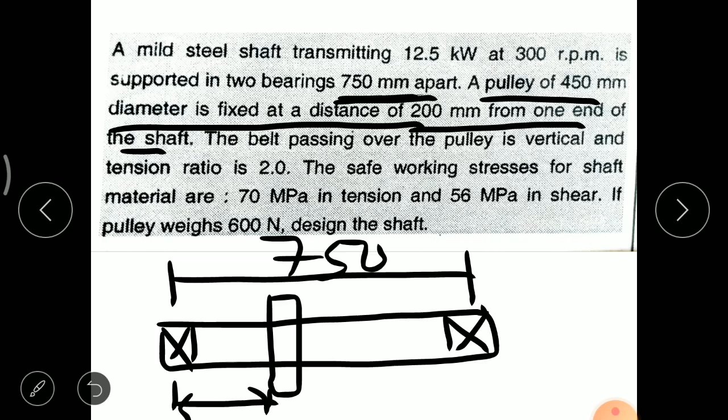Here the pulley is mounted at 200 mm distance from any one of the bearings. We will take this bearing nearest because we have to calculate moment also, and the distance between the bearing and pulley center is 200 mm. Here I will write 200 mm distance, and I will draw a side diagram, as this is the cross section of shaft and this is the cross section of pulley, over which two loads are there. This load is called T1 and this load is called T2, and there is load W, that is load of pulley, which is equal to 600 Newton.

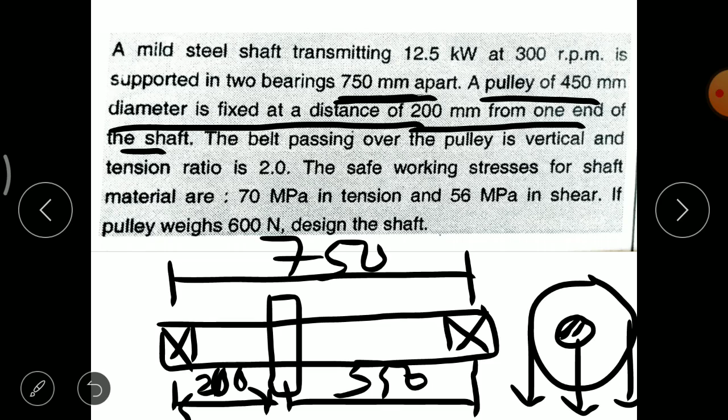Then the remaining distance from pulley to the second bearing is 550 mm. This is our diagram, and I will draw this diagram in notebook and we will solve this problem in notebook. Before that I will write given data and what we have to find. We have to find diameter of shaft, that is capital D, and the given data: P is equal to 12.5 kilowatt, N, that is RPM, is equal to 300.

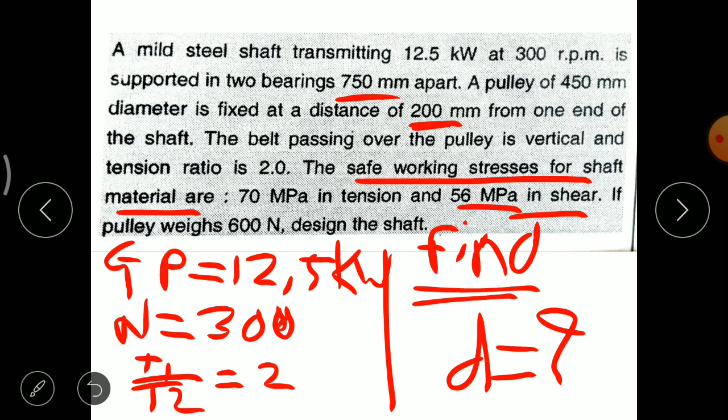Then this is the distance which we will mention in diagram. Tension ratio, that is T1 upon T2, is equal to 2. Then we have two safe working stresses of material. First one is 70 MPa in tension, and 56 MPa shear stress. That means sigma T is equal to 70 MPa, that is Newton per mm square, and tau is equal to 56 MPa, that is Newton per mm square. And now we will draw its diagram.

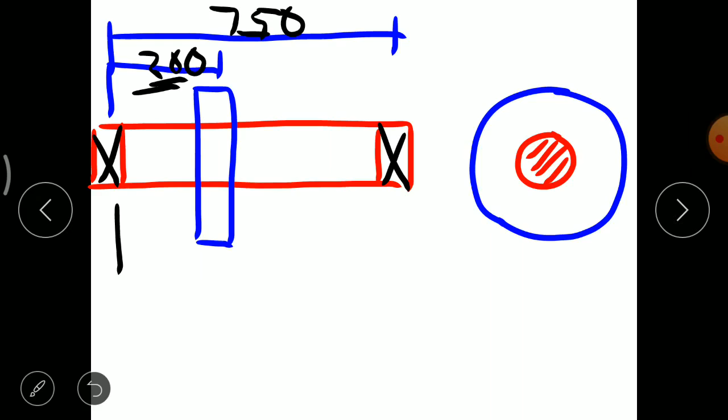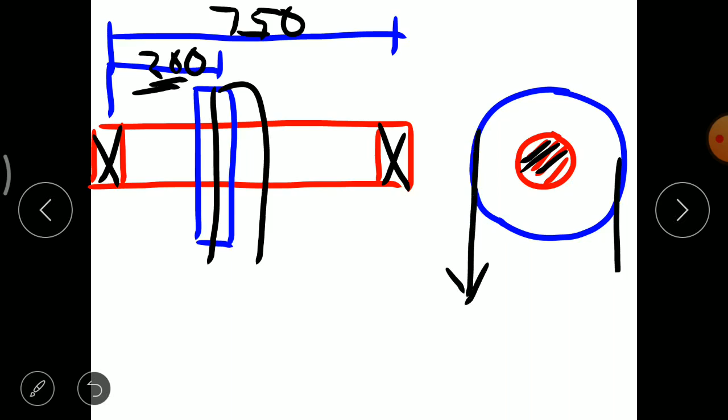This is a diagram of shaft, the red color one, over which we mounted one pulley at a distance of 200 mm from one bearing. The small circle is cross section of shaft, and the outer circle is cross section of pulley. Now they told us in the problem that the pulley is having belt in vertical direction. So I will draw two forces indicating T1 and T2, and the weight of pulley is at the center point, which is denoted by W.

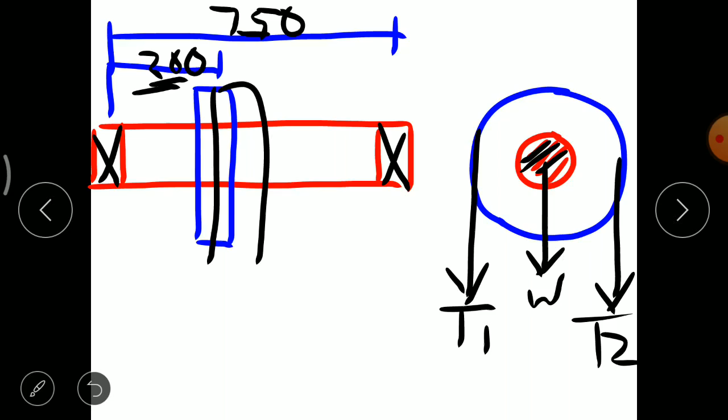T1 and T2 ratio is 2. These are the tensions on the belt, tension 1 and tension 2. Now after completing the diagram, we will solve primary things, that is torque, by using power formula, and then we use the T1 and T2 formula.

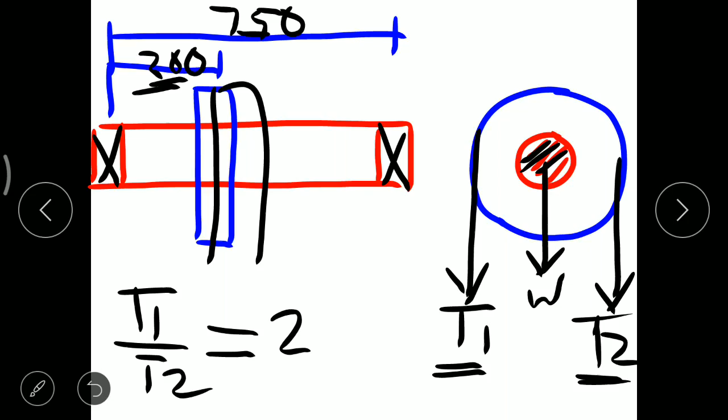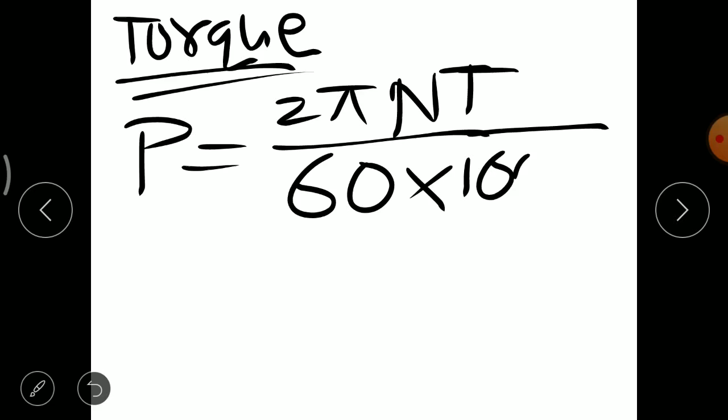We know the formula for torque on shaft is by using the formula of power, that is P is equal to 2 pi NT divided by 60, by which we will get value of torque in Newton meter. So we will multiply it by 1000 here, and then we will get value of torque in Newton mm.

Now put the value of power P, 12.5 into 10 raised to 3, N is equal to 300, and we will get value of torque. Here I will write all the necessary values that we have in the problem, and this value 60 into 1000 gets multiplied to the value of power, and then this term 2 pi into 300 gets divided, and we will get value of torque.

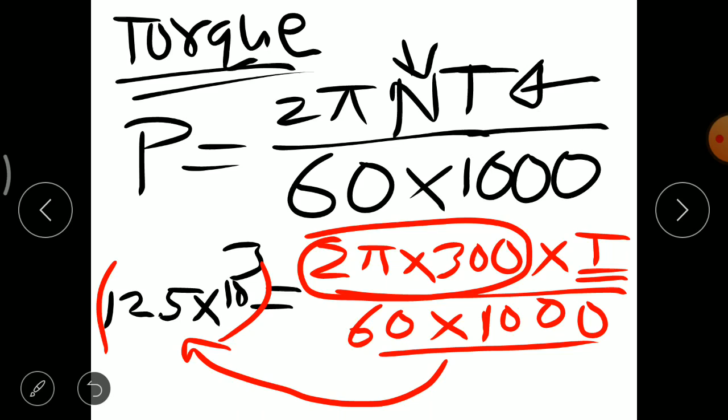Put all the values in the calculator, use brackets properly, and the value of torque T is equal to 397.88 into 10 raised to 3 Newton mm. This is the value of torque T.

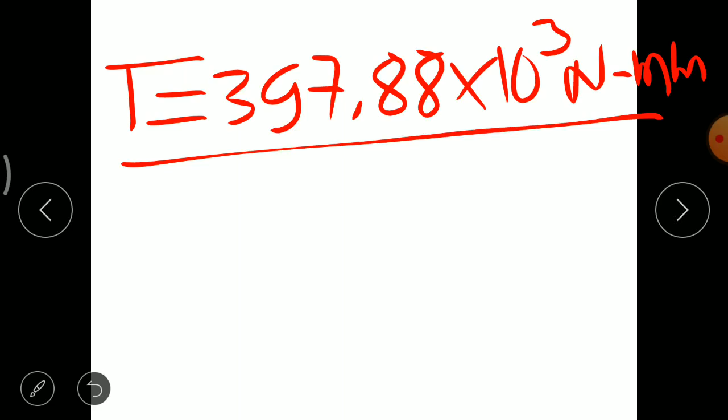Then we will put this value in the next equation, that is T is equal to T1 minus T2, bracket complete, multiply by dp, that is diameter of pulley, divided by 2, or we can call this the radius of pulley.

Now the main point here is what is the meaning of this formula, why we use this formula. Before that, you should know the meaning of torque. Then and only then can you understand how we write this formula.

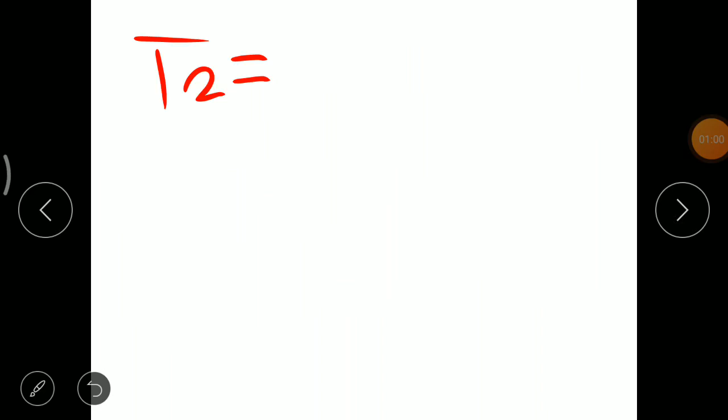225. Now we have only one unknown quantity, that is T2. This 225 gets divided into the quantity of torque and we will get the value of T2. Now T2 becomes 1768.39 Newton. This is the value of T2.

We know that T1 is equal to 2 times T2. Now put the value of T2 in this equation. We will get the value of T1 as T1 is equal to 3536.77 Newton.

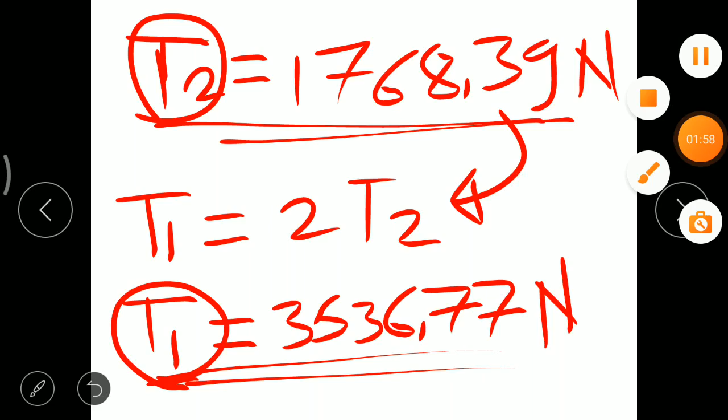Now we get two values, that is T1 and T2, and the total load on the vertical pulley is T1 plus T2 plus the load of the pulley itself, that is W, and that total load is denoted by F is equal to T1 plus T2 plus W. Put the value of T1 and T2. We know the value of W is 600 Newton.

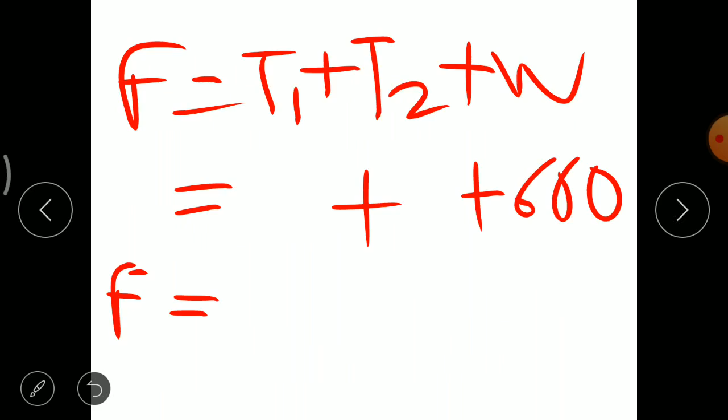Now after adding the three values, F, that is the total load on the pulley, is equal to 5905.06

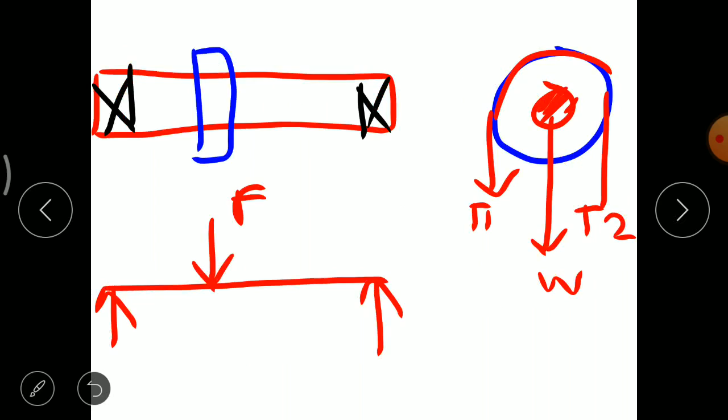We know the distance from RA to F, that is 200 mm, and the total distance from RA to RB is 750 mm, and the distance from F to RB is equal to 550 mm. Now we have to use bending moment here because the load is applied after inserting the pulley and belt. So here we have to consider bending moment and twisting moment also. Now this is the condition of combined bending and twisting moment. So we will solve the bending moment on the shaft by using this diagram.

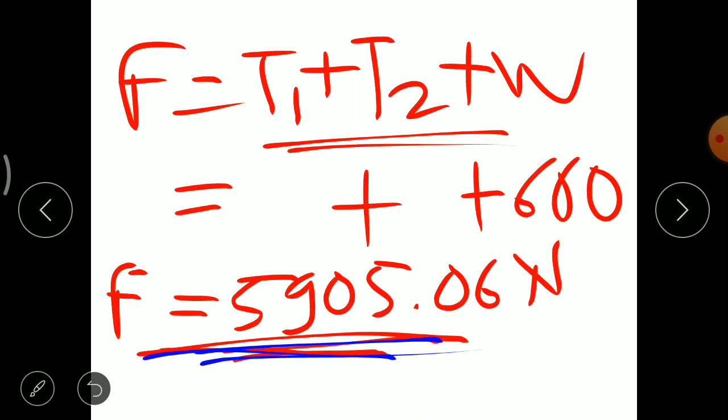5905.06. Now put all the necessary values in this equation. Then this term minus RB into 750 comes to the right side and becomes plus, and we will write it as RB into 750.

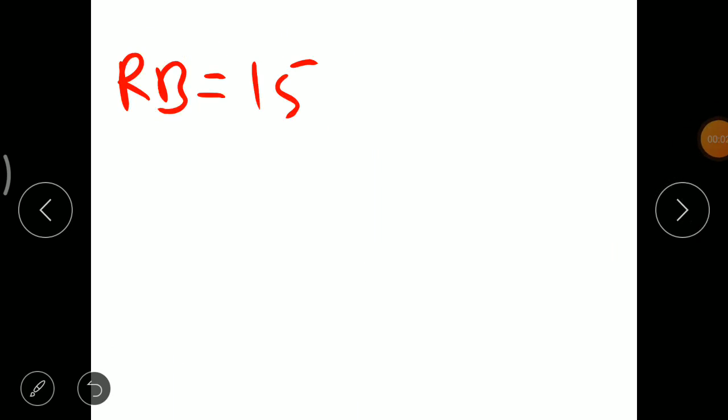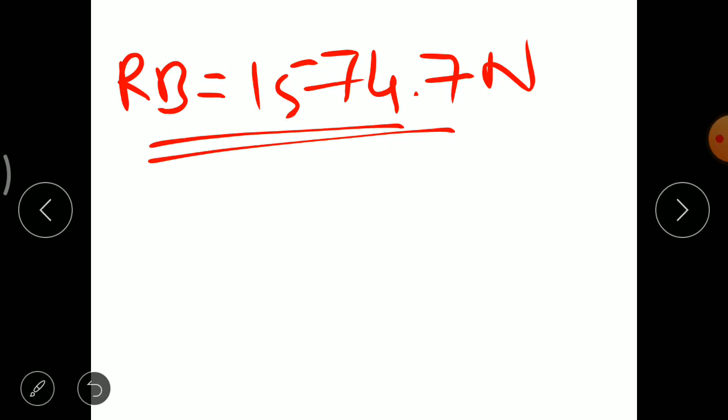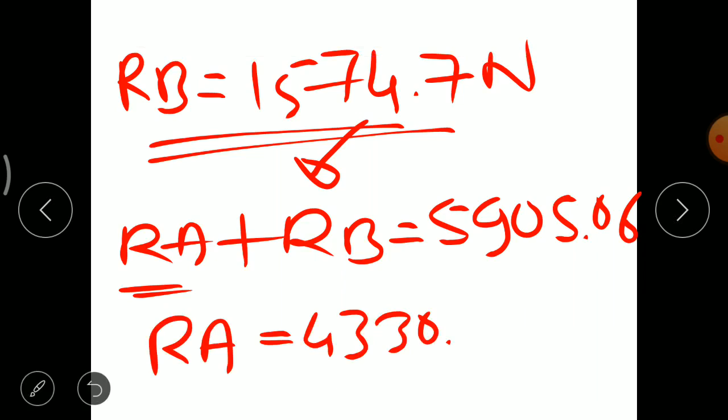Equal to 5905.06. Okay, put this value in this equation. What will we get? We will get the value of RA, and RA is equal to 4330.46. This is the value of RA.

This equation is from the diagram, that is, RA and RB are in the positive direction, so we add them, and F is in the negative direction, so we subtract it, is equal to 0. Simply I have written here RA plus RB minus the value of F, and it goes to the right side as a plus value.

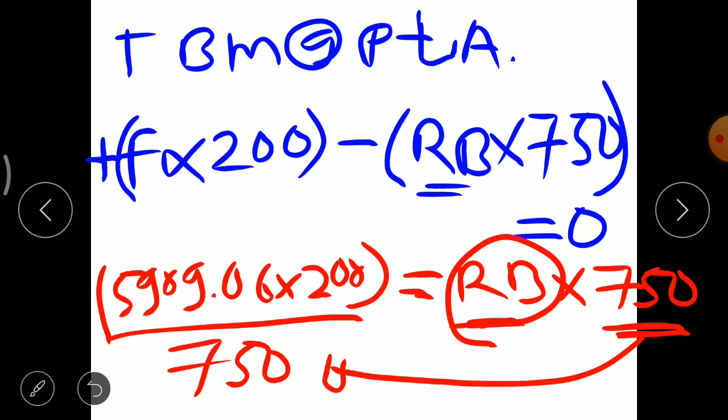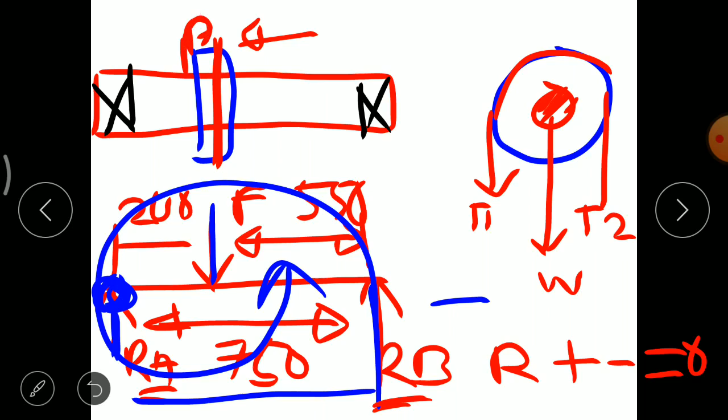But here we need the value of M, that is bending moment at loading condition. And where is the loading condition? Loading condition is at pulley point. Now we will write here the pulley point as a P point, and the bending moment is nothing but RA into perpendicular distance. Okay, and the value of RA is 4330.46 into perpendicular distance is 200 mm.

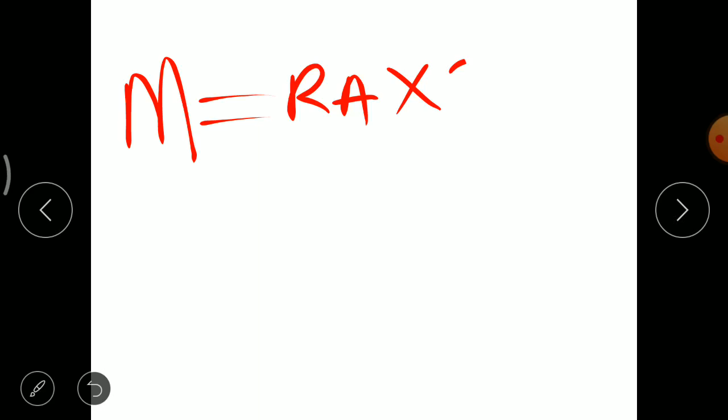Now the M is nothing but the bending moment at point P, so it is RA into 200 mm is equal to 866.09 into 10 raised to 3 Newton mm. Okay, this is the value of M, and we need this value while solving the problem by considering maximum shear stress theory and maximum principal stress theory, because the problem is of case number 3, that is shaft subjected to combined bending and twisting moment.

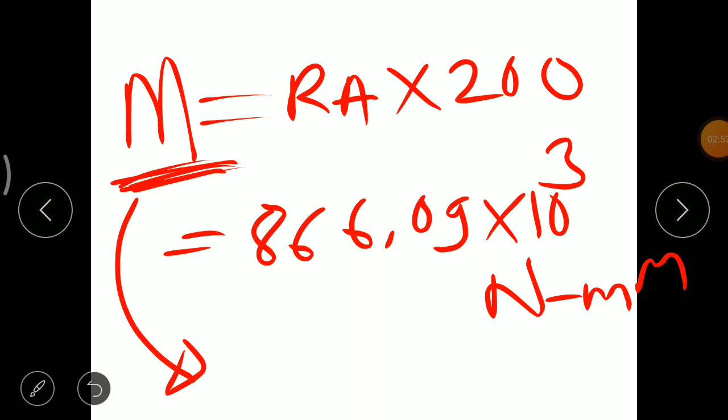Now up to here we calculated the value of M, RA, RB. Now we will solve it for two conditions, that is maximum shear stress condition and maximum principal stress condition. Here I will write diameter of shaft subjected to maximum shear stress condition, and we know that the formula for maximum shear stress condition, that is Te is equal to under root of (KB into M) square plus (KT into capital T, that is torque) square. Now we know that the value of KB and KT here is 1. So 1 square is 1.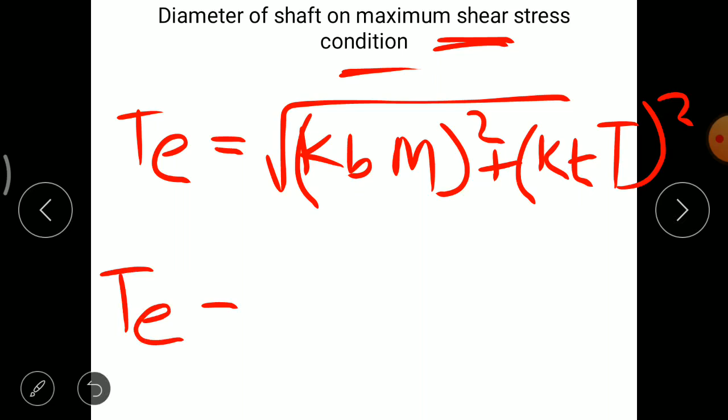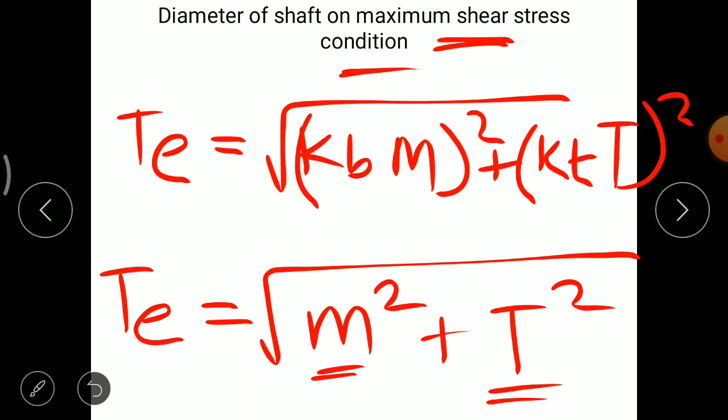So I will write the equation again by simplifying, adding the value of KB and KT. Te is equal to under root of M square plus T square, and M is nothing but bending moment and T is nothing but torque. Put both the values here that we have calculated, that is the value of M and value of T. First of all, take the value of M in the calculator and take its square. Then take the value of T, that is 397 into 10 raised to 3, and take its square. Add both the terms and then take its under root.

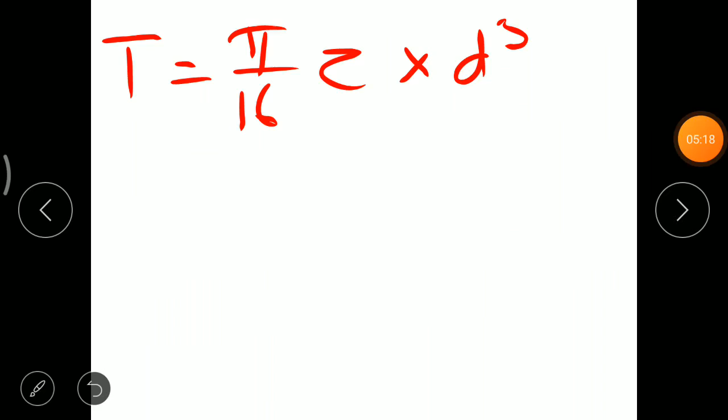The value of Te becomes 953.11 into 10 raised to 3 Newton mm. This is the value of torque or Te. This value is of equivalent torque, but we have to find diameter of shaft, and for that purpose we use the torque formula, that is T is equal to pi by 16 into tau into d cube. We know this formula, but here we have to use value of T as Te, that is equivalent torque, and tau as tau max.

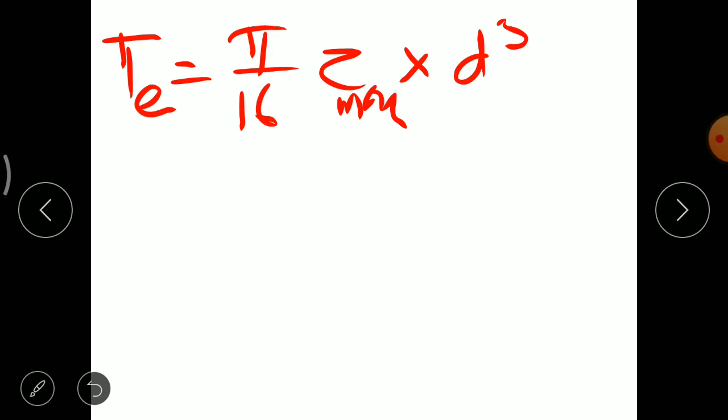Put all the values that we have calculated. Value of Te, 953.11 into 10 raised to 3, is equal to pi by 16 into 56 into d cube. Now this value goes in the denominator and divides the value of T, and we will get the value of d cube. And by taking the cube root of that quantity, we will get the value of d as 44.25 mm, that is 45 mm. Okay, this diameter is on the basis of maximum shear stress theory.

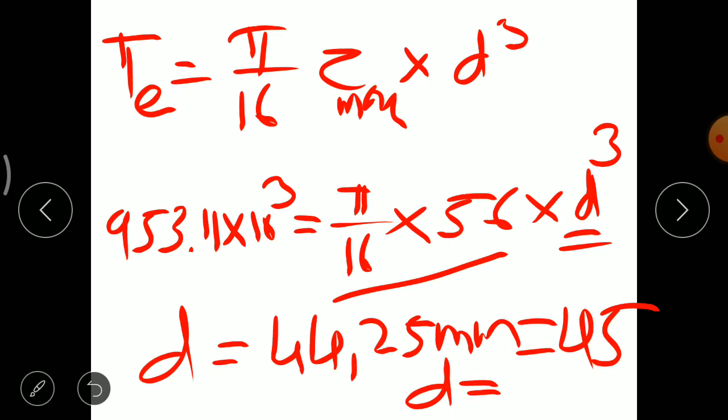Now the second case is diameter of shaft on the maximum principal stress condition, and we know that the formula for that is Me is equal to half into bracket KB into M plus under root of (KB into M) square plus (KT into torque, that is T) square. Now put the value of M and T, that is bending moment and torque, and the values of KB and KT are 1, and we will get the value of equivalent bending moment is equal to 909.6 into 10 raised to 3 Newton mm.

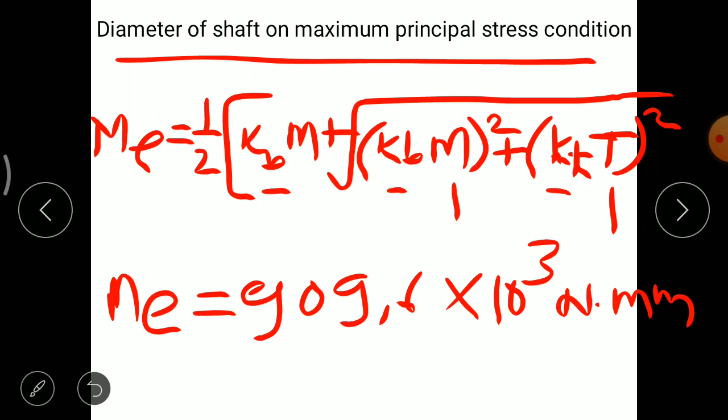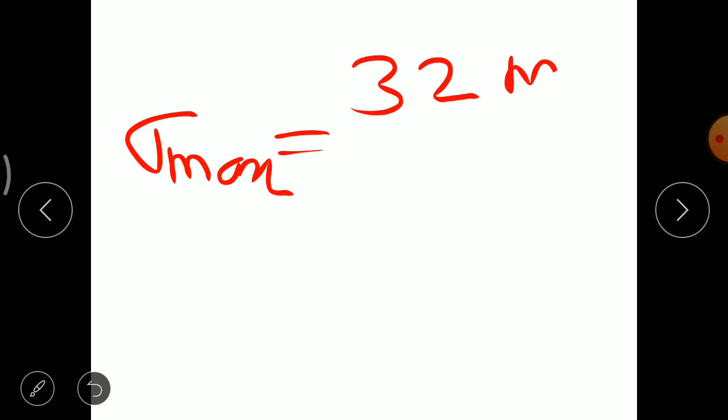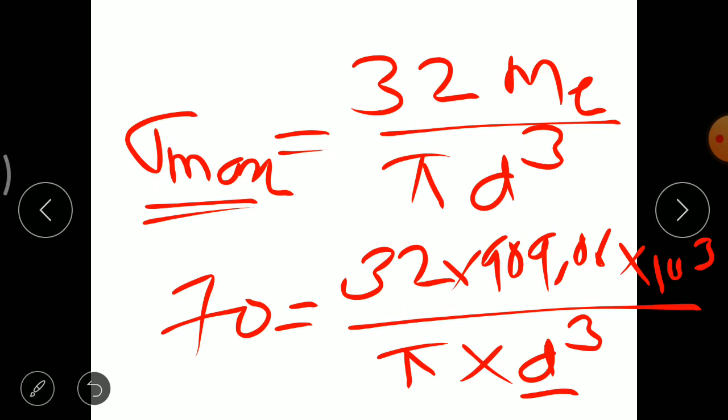This is the value of Me, and we know that sigma max, or the bending stress, is 32 Me divided by pi into d cube. Put the value of sigma max, that is 70, and 32 as it is. Me that we have found here is 909.6 into 10 raised to 3, divided by pi into d cube. Now the d cube comes here and 70 is in the denominator.

Solve this side first of all, and we get the value of d cube, and by taking the cube root, d is equal to 50.96 mm, that is d is equal to 51 mm. And the diameter D is taken as the larger of the two values, that is diameter by maximum shear stress theory, which is 45 mm, and diameter by maximum principal stress theory is 51 mm. So we will take 51 mm diameter for shaft, so it cannot fail in bending moment and torsion condition.

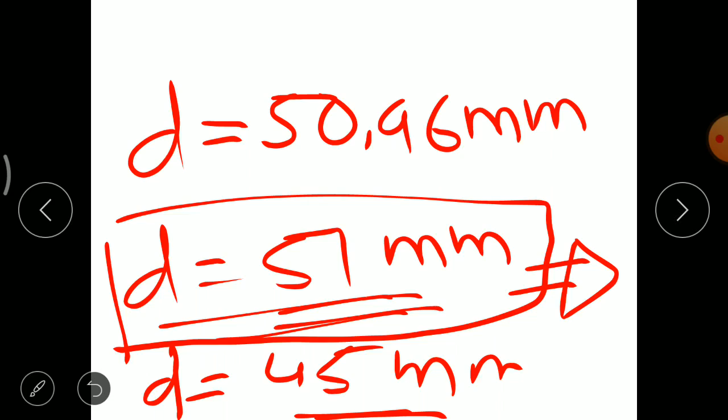This is the main design of shaft for both the conditions, that is torsion and bending moment. And this type of problem is asked in examinations for 6 to 8 marks.